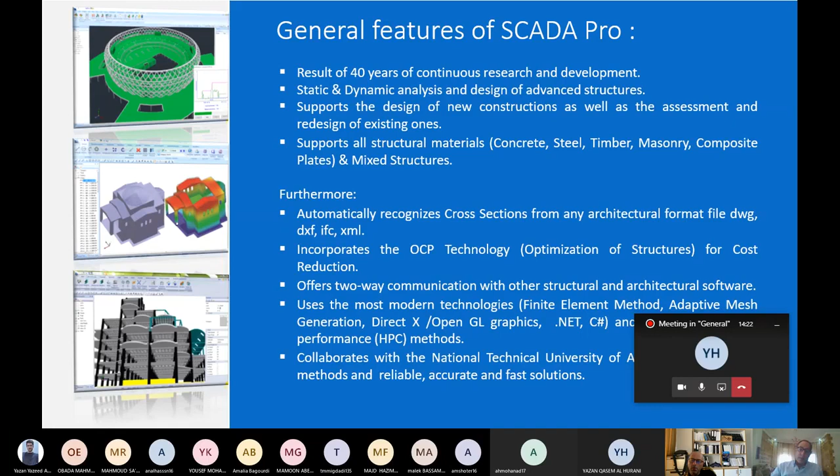It automatically recognizes cross sections from any architectural format file, DWG file, DXF file, and incorporates OCP optimization structure for cost reductions. It also offers two-way communication with other architectural software and uses the most modern technologies. Our software has a collaboration with the National Technical University of Athens to create new methods and reliable, accurate, and fast solutions.

Also, its interoperability with leading applications and standard file types. SCADA Pro integrates BIM technology with two-way communication with any architectural and structural programs. Autodesk Revit, GStarCAD, like AutoCAD, ArchLine, and Arcadia are architecture softwares. IDEA StatiCa is software for steel connection design. As you know, also the structural programs ETABS and SAP.

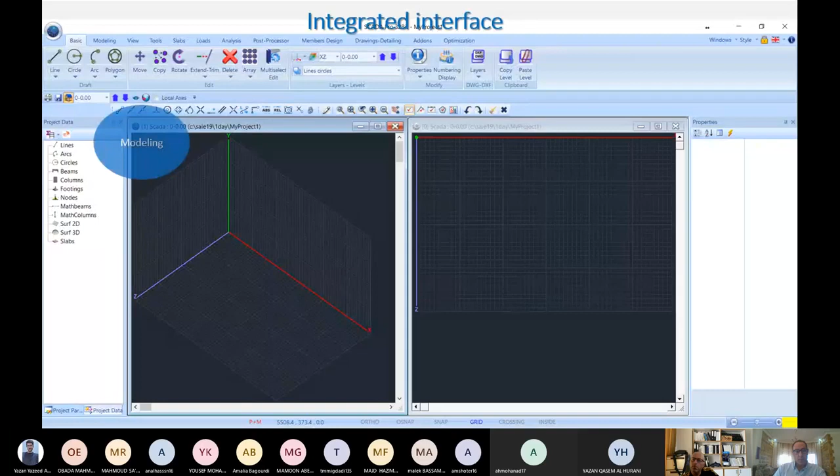This is the interface of SCADA Pro when you open it. It has different steps that we're going to use to start. We're going to start from modeling. You need to model your structures, your foundations, the elements. You're going to see the loads, static loads, dynamic loads, using different regulations, Eurocodes, or each country's regulations and annexations. It also has Saudi building code. You can do the analysis, and it automatically calculates the combinations.

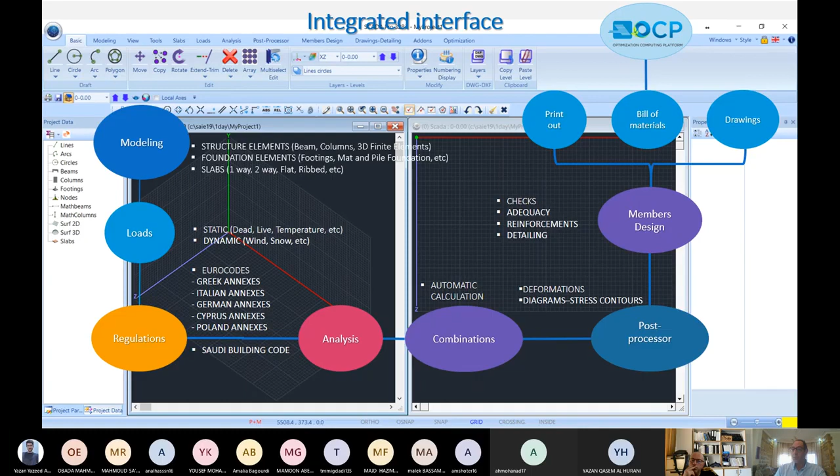In the post-process, we're going to see the deformations and the structural stresses and others. And also in the member design, we'll do the checks, reinforcement, and detailing. In the output, you're going to make the drawings, the bill of materials, and the printouts, and finally we can do the optimization of the structure.

Also, it has an advanced interface. You can create multiple windows in your interface when you open the program, and these multiple interfaces can give you a model with direct display of the screens and checks, also display and edit of data with tables in front of you. It also has a powerful graphic library with high resolution virtual display, so you can see the whole structure that you have modeled.

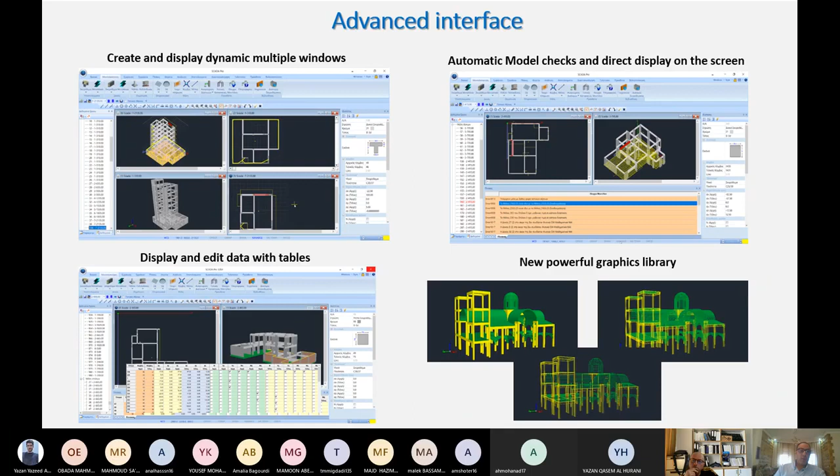Also, SCADA Pro is a multilingual environment which contains 8 languages, which also does the analysis and checks according to the country's regulations and annexations, and provides printouts in the respective languages. Also, it integrates the Arab regulations, Saudi building codes for concrete, steel, and masonry buildings.

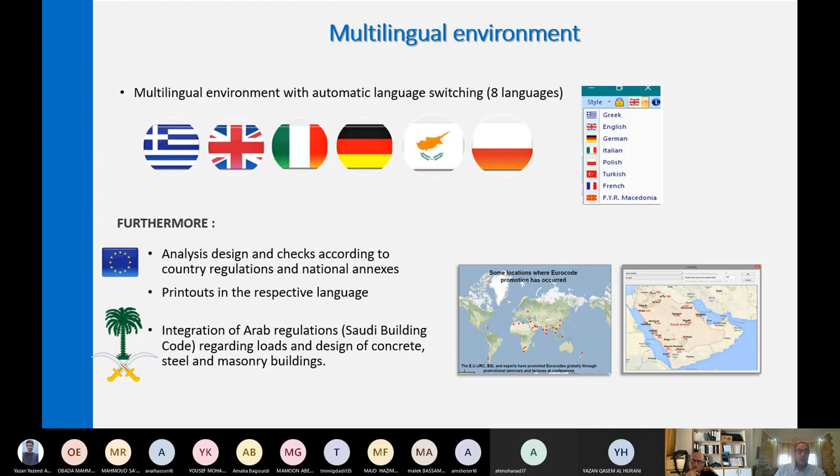Let's see what SCADA Pro enables the user to do, making your life more convenient in the workspace. As we said, it recognizes cross sections from any architectural design, 2D or 3D DXF files. For example, from AutoCAD, a 2D file, you can import it to SCADA Pro manually, or you can import it automatically, which will recognize all the cross sections of the plan and the structure, and will make the models automatically.

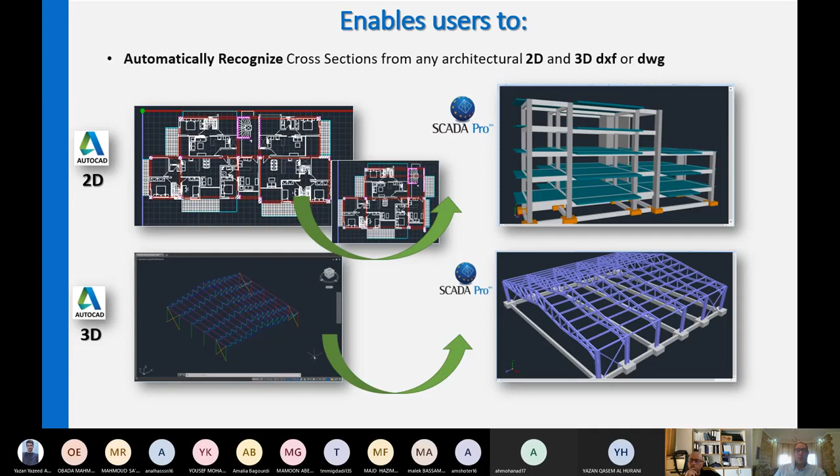Also, in the 3D view, SCADA Pro will recognize any lines. You can insert them automatically just to apply the cross sections and make the final model of the structure. It also enables users to automatically convert lines, arcs, and circles into corresponding design objects of SCADA Pro, and automatically creates 3D objects from the outlines of any shapes through front view identification, which helps you create any structure you want. It also enables bi-directional communication between ETABS and SAP with SCADA Pro.

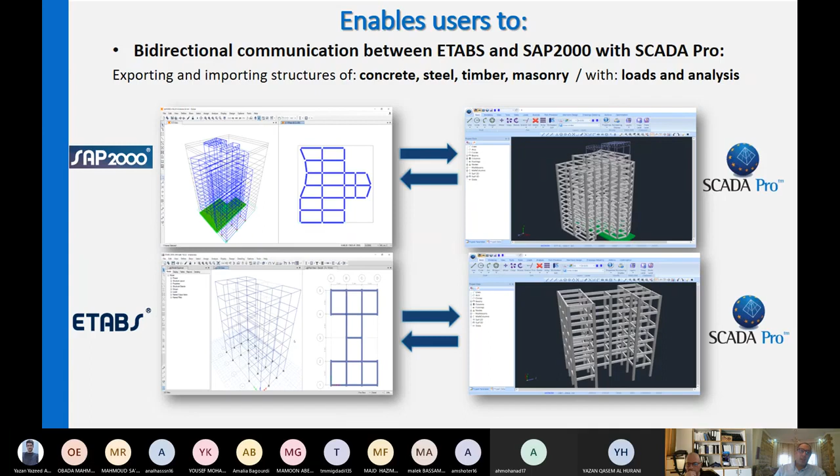We can import and export concrete, steel, timber, masonry with the loads and the analysis. For example, here we have a project from SAP, and SAP has the American codes. You can import in SCADA Pro to use the Euro codes and do the modeling and design of the whole structure, or you can model and design the structure in SCADA Pro, which has the simplicity and other capabilities, and just do the analysis for the American codes in ETABS.

Also, we have bidirectional communication with architecture applications. You can import files from Revit and IFC files from ArchLine that provide accurate data which allow the automatic identification of all components in SCADA Pro - columns, beams, slabs, etc. - with their respective properties in order to create the model, analysis and design.

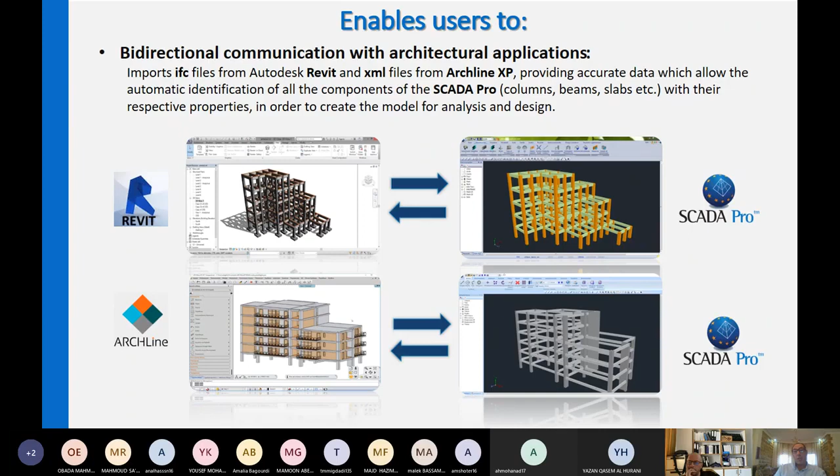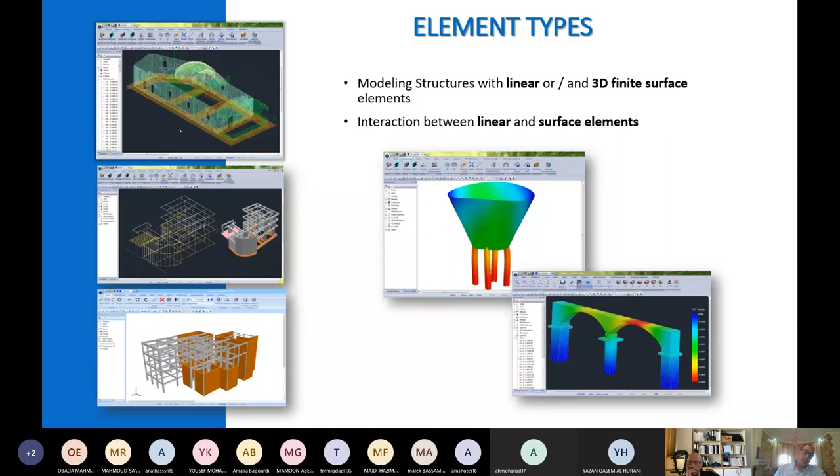Also, we have different elements that the software uses, so you can model structures with linear and 3D finite elements, in interaction also between linear and surface elements. So you have many capabilities in the software.

Also, the type of analysis the software does - we have static analysis, linear static analysis, linear dynamic analysis, pushover analysis. The professor will explain to you what pushover analysis is. Linear time history analysis, non-linear time history analysis, according to the Eurocode and Saudi building code.

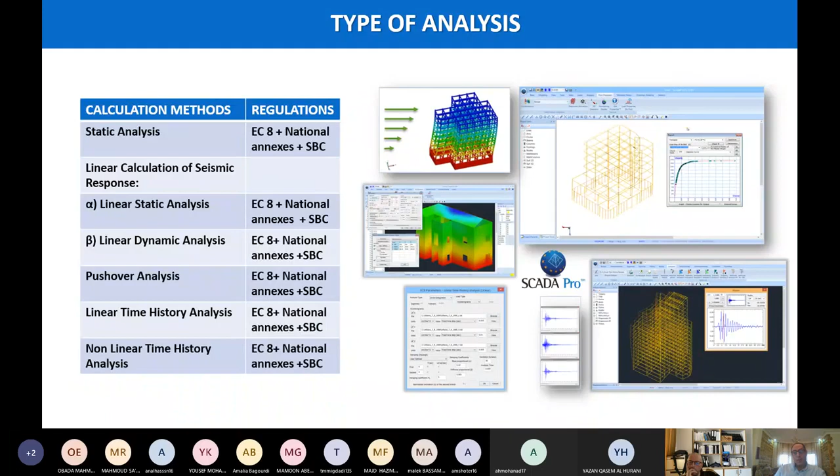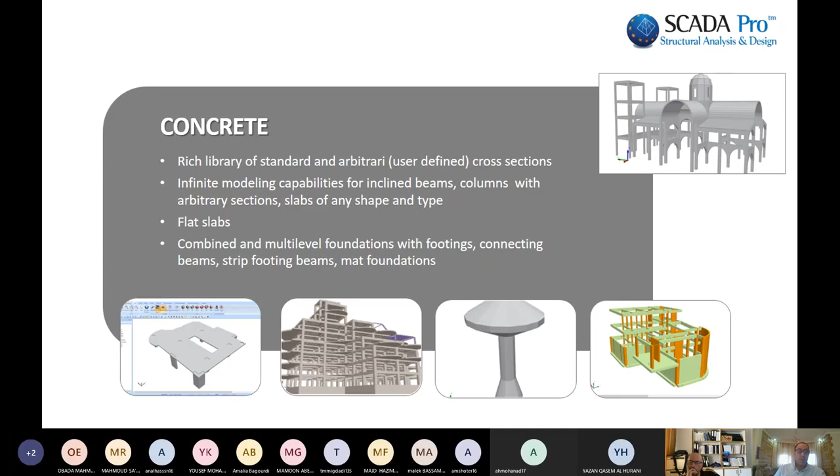Type of materials that you use - we're going to start with concrete. SCADA Pro offers a rich library of standard and arbitrary cross sections, infinite modeling and capabilities for inclined beams, columns with arbitrary section slabs of any shape and type. It can also do flat slabs, combined and multi-level foundations with footing, connecting beams, strip footing beams, mat foundations.

So also here, the simplicity of the software gives you unique features - the software automatically recognizes the thickness of the slabs and automatically designs the whole structure, members, and displays. It also gives you fail design checks, so you can know where the failure is and what the cause of the failure is, and will display the strength ratio in different colors.

Also, a unique feature in design is the powerful reinforcement editor for editing, modification and 3D display of layouts of the reinforcement. So you can do the reinforcement, automatic bending, shear checking, and moment resistance calculation by the M-N interaction diagrams.

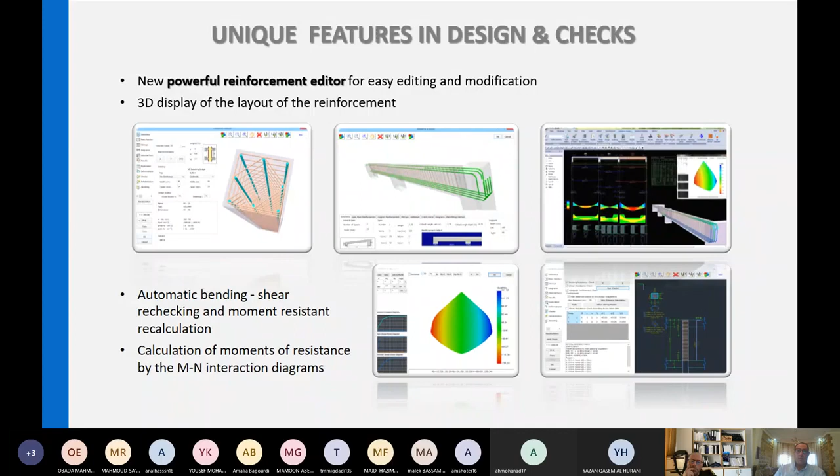So you can do all these, alter them and change them, and see them in 3D view and change and alter them. This will make your life simpler to edit and change these things.

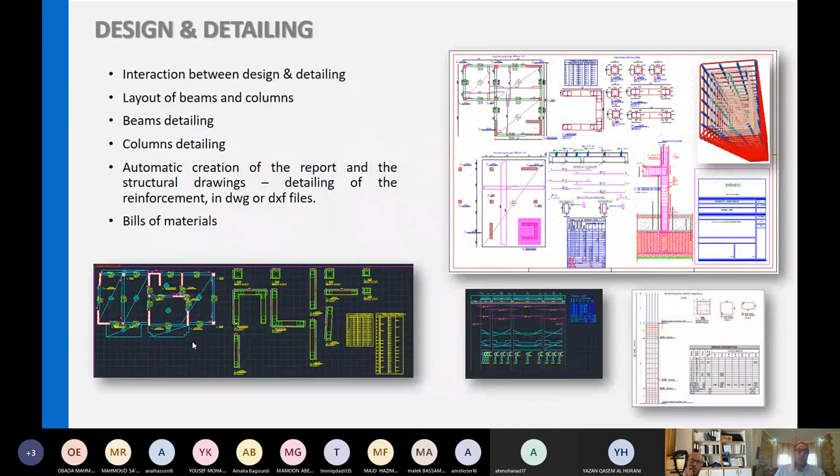Also in design details, it gives you layouts of the beams, the columns, beam detailing, column detailing. You can also create a report for structural drawings, details and reinforcements into a DWG file, and it will also give you the bill of materials.

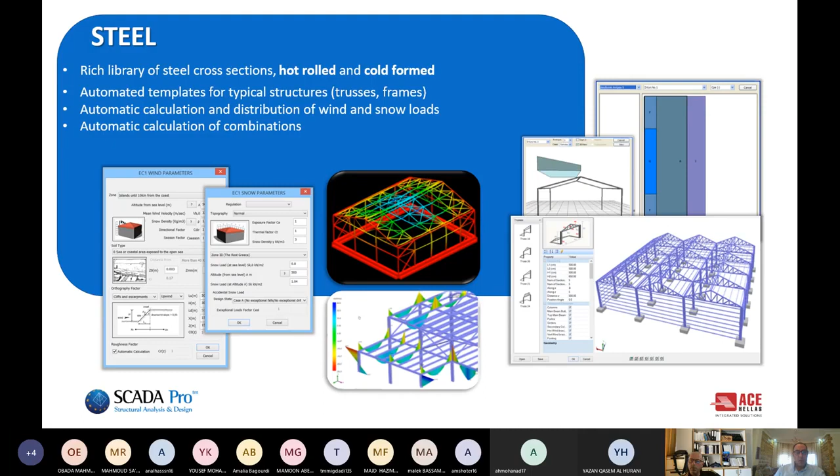For steel, we have a rich library for steel connections, steel sections, hot rolled and cold form, and automatic templates with different typical structures, and it automatically calculates and distributes wind loads and snow loads, and automatically calculates the combinations.

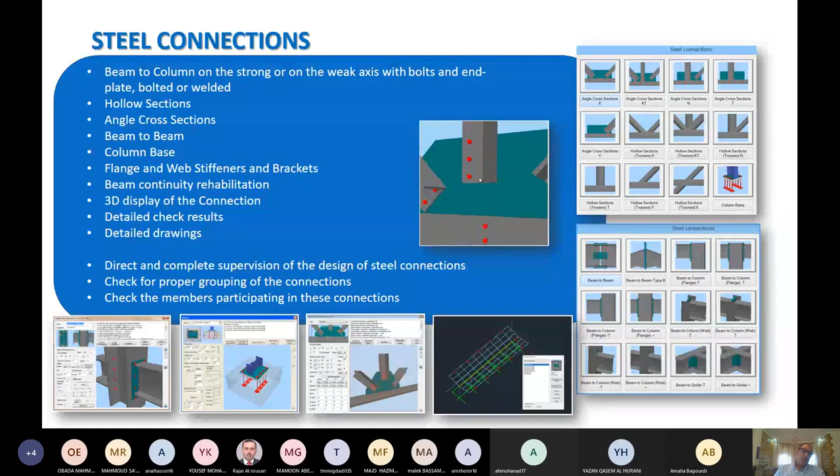You can also see here design checks for the steel member connections, checking for structure members - bending, torsion, buckling - all necessary checks for ultimate and serviceability limits, and analysis design of composite structures, and design of all types of structures.

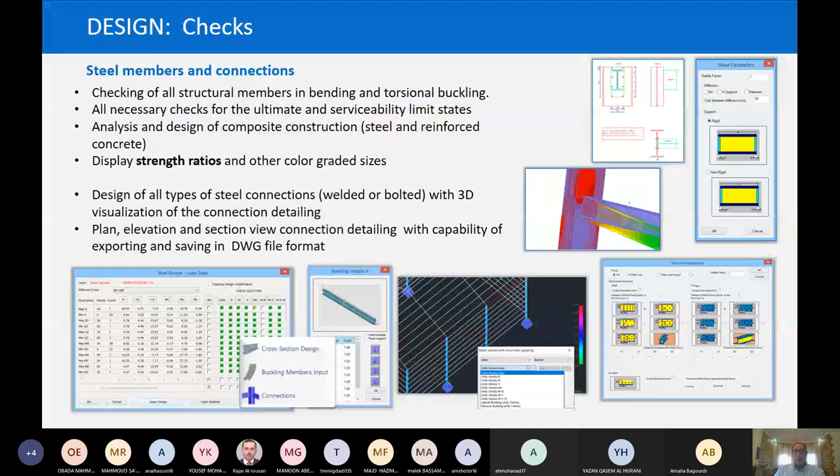All these you can plan, elevation and section view, with connecting details, and the capability of exporting and saving it to a DWG file format. Also, we have cold form steel sections.

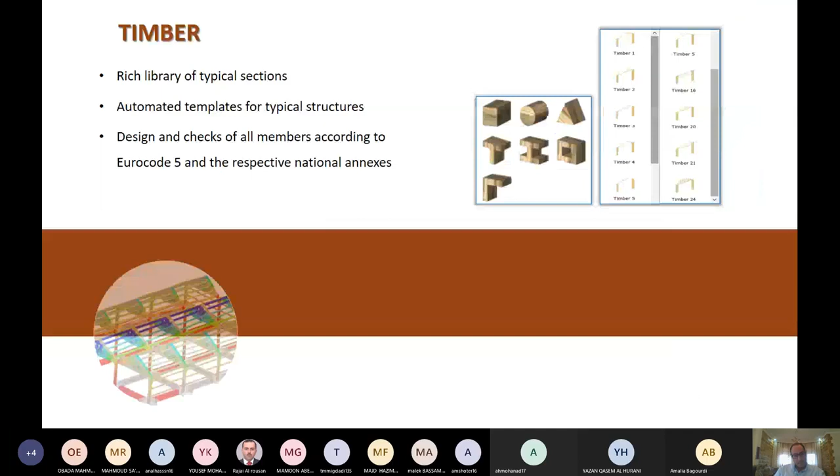Also, timber - a library of typical sections and automated templates, and design checks for all members according to Eurocode 5 and respective national annexes. Also, timber connections - it does checks for the timber members and connections according to Eurocode 5.

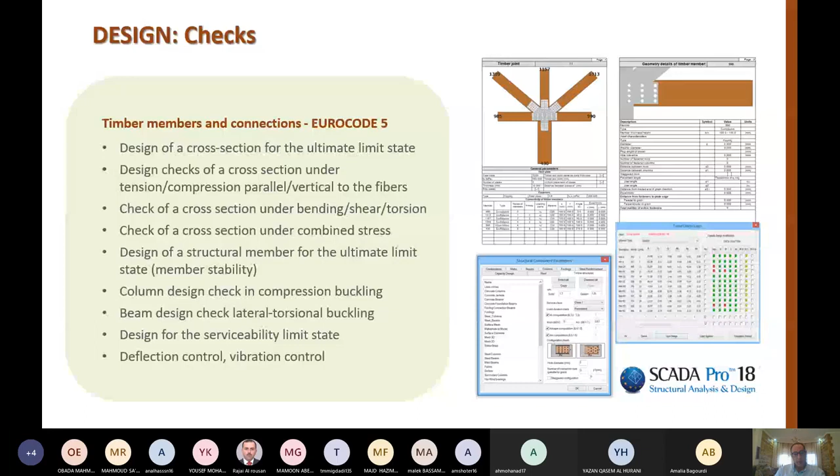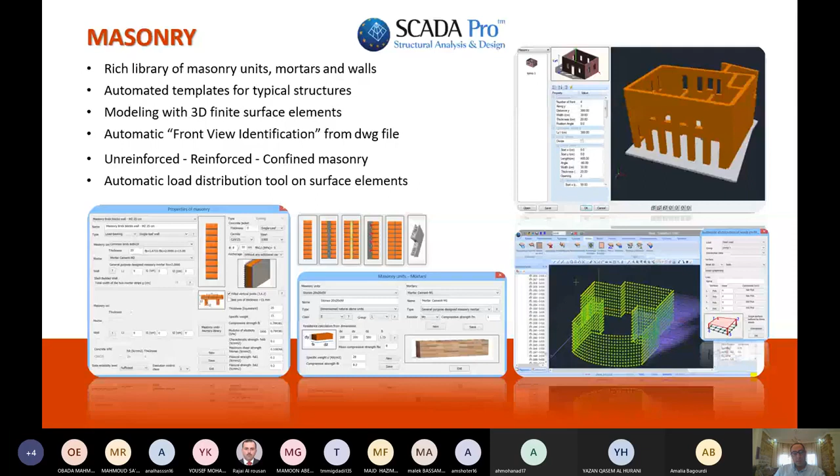Also, we have masonry - a rich library of masonry units and mortar walls, and automated templates for typical structures you can do with 3D finite surface elements, and automatic front view identification from the DWG file. It will also do automatic loads and distribution on these elements, and do the design checks for piers and spandrels of the masonry wall according to Eurocode 6.

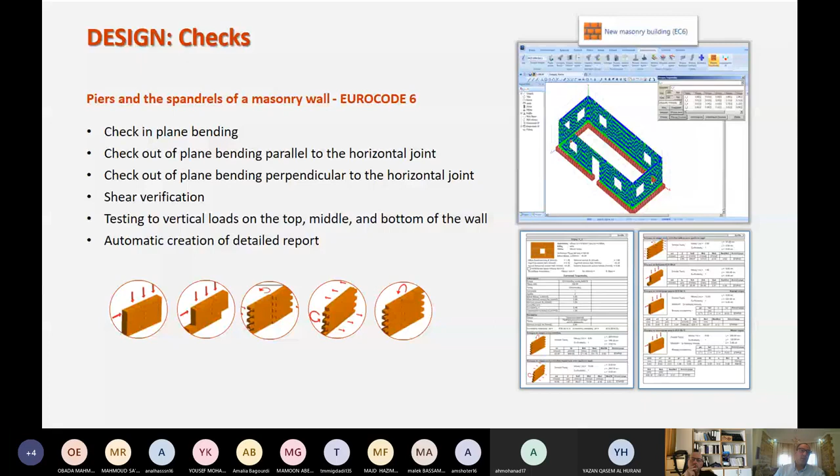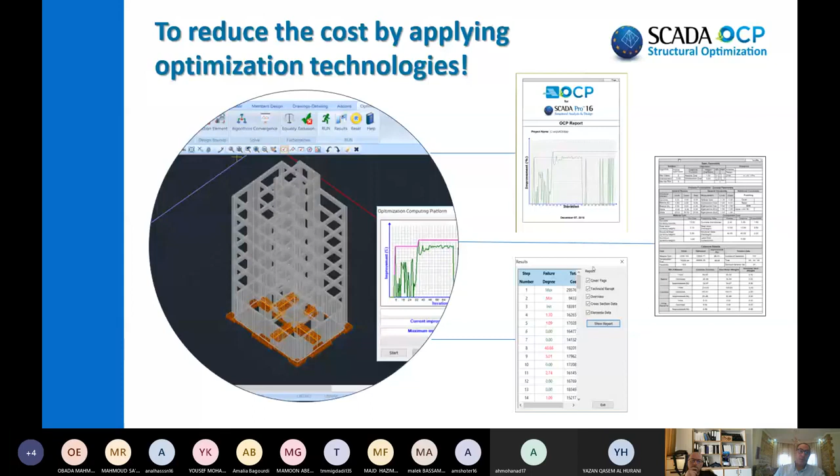And here finally we have the SCADA Pro OCP structural optimization module. It's a module to reduce cost by applying optimization technology.

It's an OCP computing platform that applies optimization theory to real structures with the ultimate goal to minimize construction costs from materials and labor. This will help you reduce your cost from 10 to 25% in any project, and according with the regulations and codes you're using.

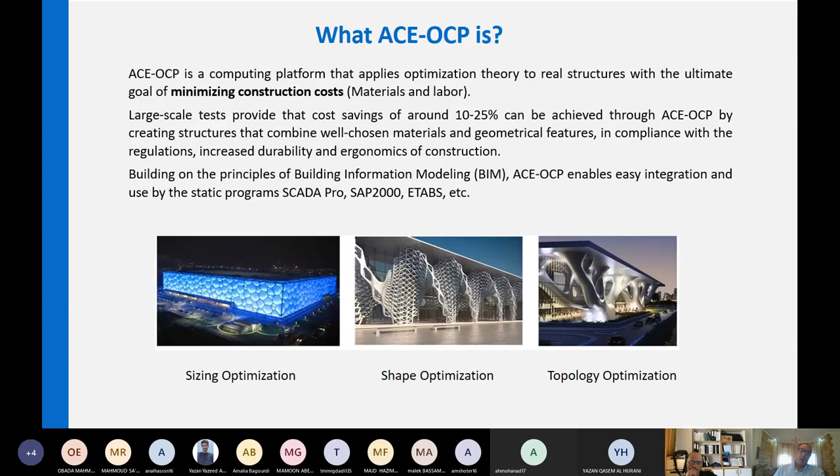Also, it has BIM technology, which is building information modeling, so you can use it with other software like SCADA Pro, or SAP 2000, or ETABS, and others.

Thank you very much. It's a small presentation for SCADA.

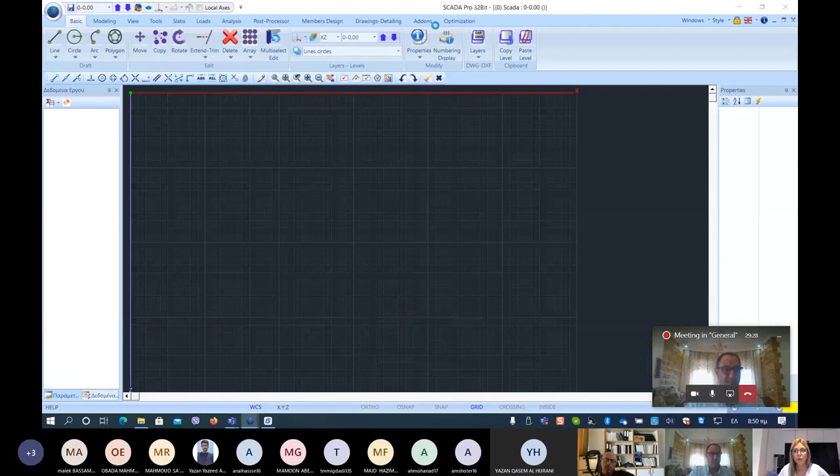I waited a minute to open the software and I will show you what I want all of you to do. I believe you already have the student license and have the software on your PCs. What I want you to do is right click, go to properties, compatibility, and run this program as administrator. You see in my computer it's already enabled because it's already done. Click this, then apply, and you will use it as administrator. This is important because you will have all the opportunities that the software gives you.

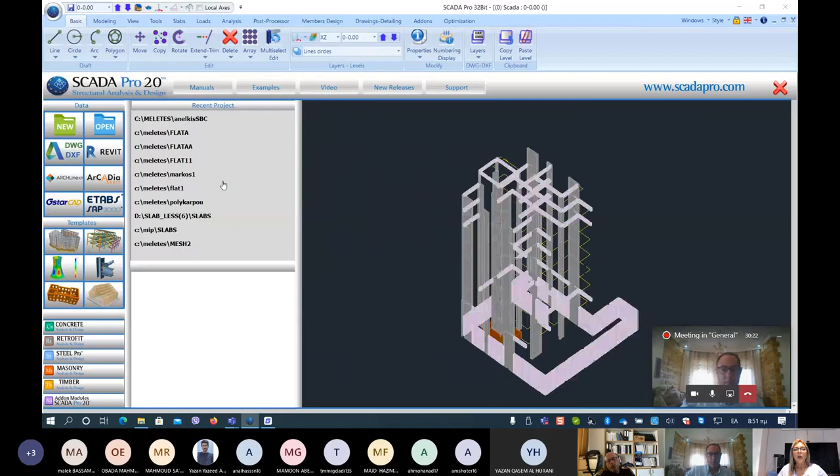So let me go on. Why do I have it two times? Let me start from the beginning. Okay, this is how the software begins.

In the middle of the interface, you see this window. This window gives you a lot of opportunities. This is the first part that we see, and you can click these tabs to start a new project or open an existing project. You can use this button that we will use together - this is very important because you can do automatic recognition of the structural elements, like Mohammed told you in the presentation. We will push this button and see what we can do.

But let me go on. Okay, this is a Revit button. This means that if I click on Revit, I can read a Revit file, an IFC file, and import it directly inside the SCADA Pro environment. ArchLine XP is the same thing - I can read an XML file.

Arcadia is another architectural software, so I can do the architectural part and then use it directly inside SCADA Pro. GstarCAD is another software like AutoCAD, okay? And ETABS and SAP, you know very well - these are structural softwares that can be read from SCADA, and not only read, I can continue with the project inside SCADA.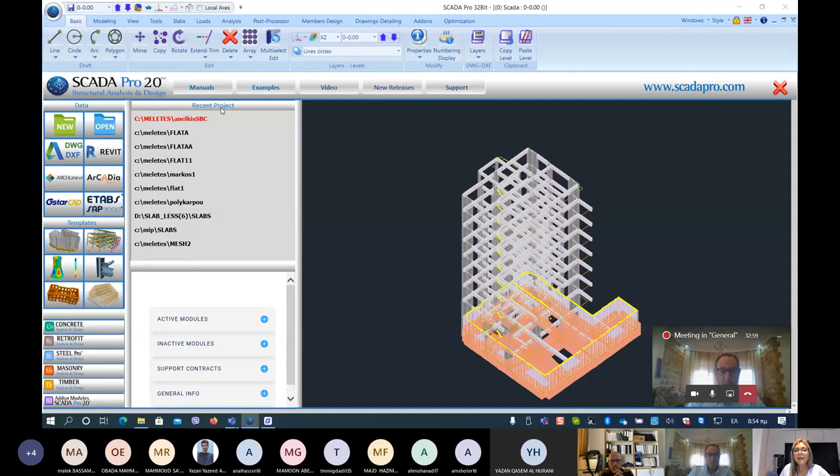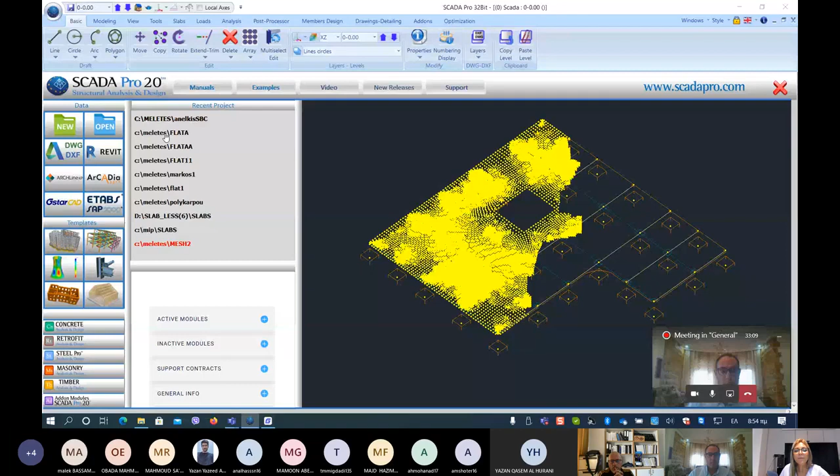And here you can see the different modules of SCADA. So you can have the concrete, the retrofit, the steel, masonry, timber, and all the other add-ons of SCADA Pro. Here I can see some recent projects - if I click on this, I can have a preview of the model inside this project file, and some details about the modules you have, what is active and what is not active in your permission.

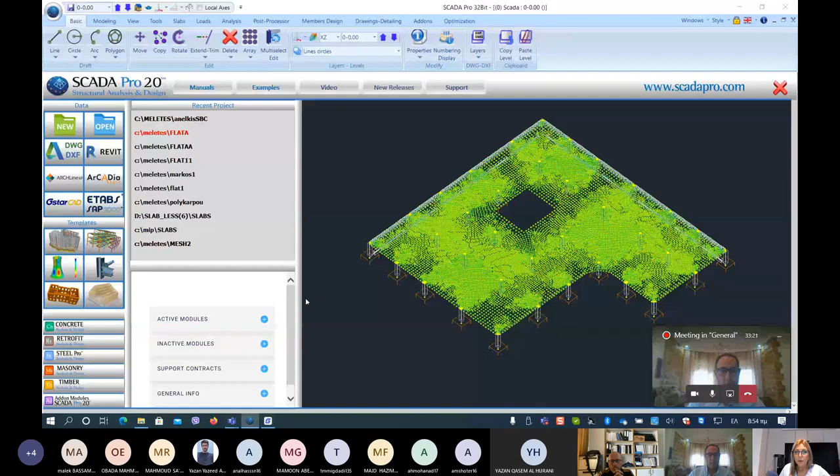If I click manuals, this would be very useful for you. Inside you can find some PDF files that contain the manuals of the software. Each manual has the same name as the tabs you see on top, like basic, modeling, view, tools.

Inside examples, you will have other PDF files that are entire examples of different projects. We will talk about the first example that contains a new concrete building, and we can see a lot of features of how to complete an entire project. This will be useful for you.

Videos give you the opportunity to see some videos that can help you have a look at what you can do inside SCADA and how to do it. These are the most important. New releases and support are not so important.

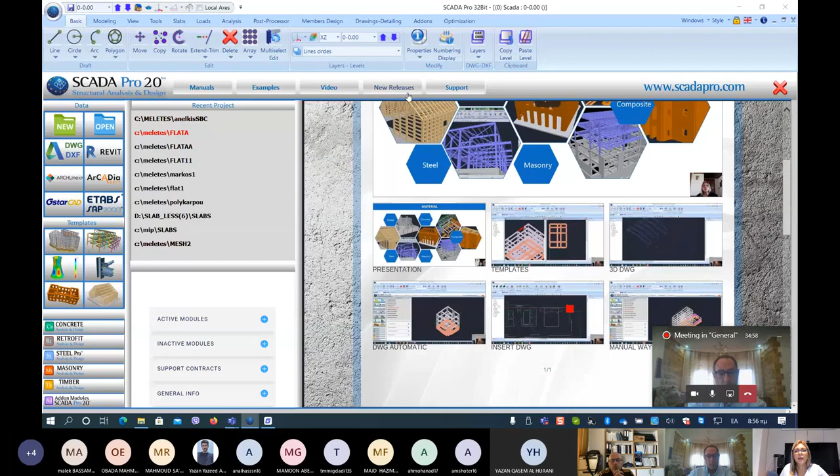So we explained this first window that is very important, but let me tell you something: if you don't close this window, you cannot do anything. I click here and I only hear some bling, so I can't do anything. I need to either close this window or click one button in order to start doing something.

Let me tell you another important tip. I will start with new, no automatic way, nothing ready. I will not use any BIM connection, just new. I click new, and here the software tells me to give it the name of the project. So the first thing you always have to do is type a name for the project.

So I will say this project is called lesson1. Let me tell you something: because this is an international software, we have to take care of some rules. Because of different characters in Greek, in Jordanian language, please use only English, Latin letters in order to type the names. I want you to take care of these details: use only Latin letters and numbers, and please do not use any question marks, lines, spaces, or specific characters.

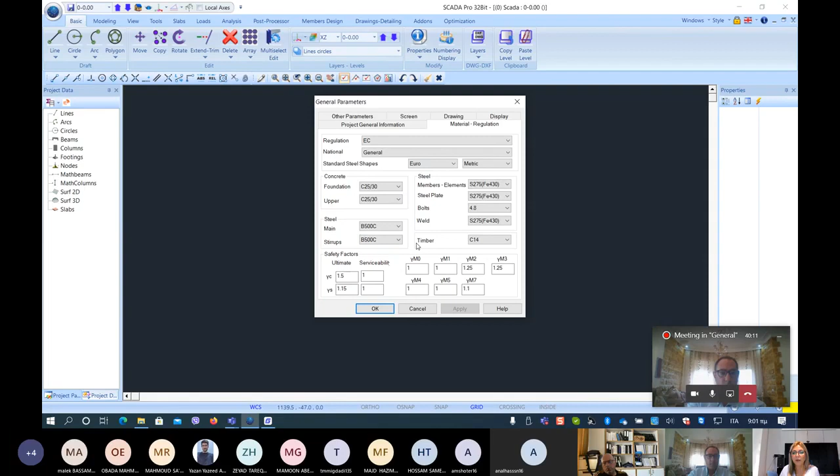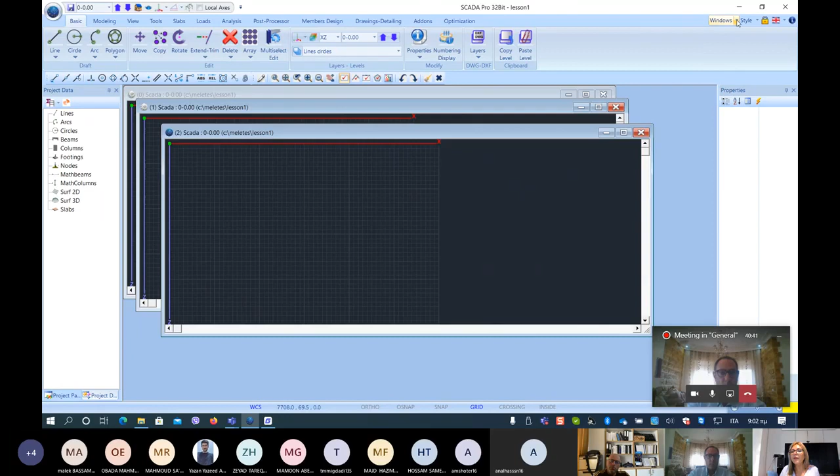I click OK, and now everything starts. So you see two kinds of windows inside the environment. I can decide to switch off one of them and keep the other, or I can decide to create more windows like this, and then decide how to arrange all these windows.

Why do we have all these windows? Because you can see the 2D view, the 3D view, and maybe the virtual view, and maybe you have two screens, so you can move one of them to the other screen. The most important thing is that everything you do in one window, you can see in each one. You can also start in one window and continue in the other. We will see all these things while we work.

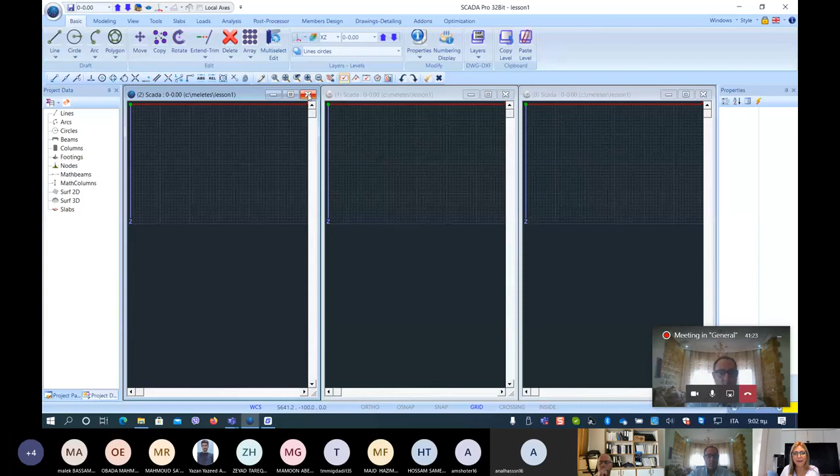So let me start with one window. Here we are in the 2D view. You see something maybe a little strange: the 2D view is the XZ axis, and the Y axis is the vertical one. This is fixed, you cannot change it. You will use XZ for the floor plan, and Y will be the height.

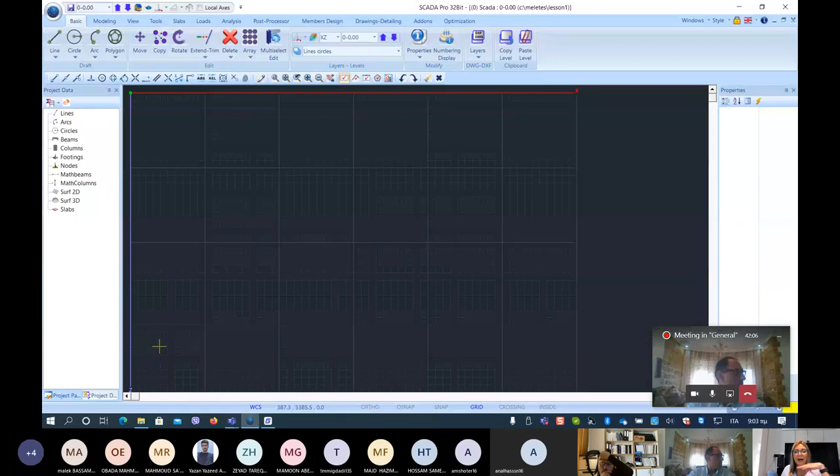In this environment, let's start explaining these tabs. We'll start with the basic one. Here you can find commands that are very common in CAD software: you can draw a line, a circle, an arc, you can move, copy, rotate, extend and trim, delete. These are architectural commands.

Here you can see layers, something very common also in CAD software, and the levels. Let me explain this. You see that I am in level 0. So the first window is level 0, and what's really important to understand from the beginning is that level 0 is the foundation level.

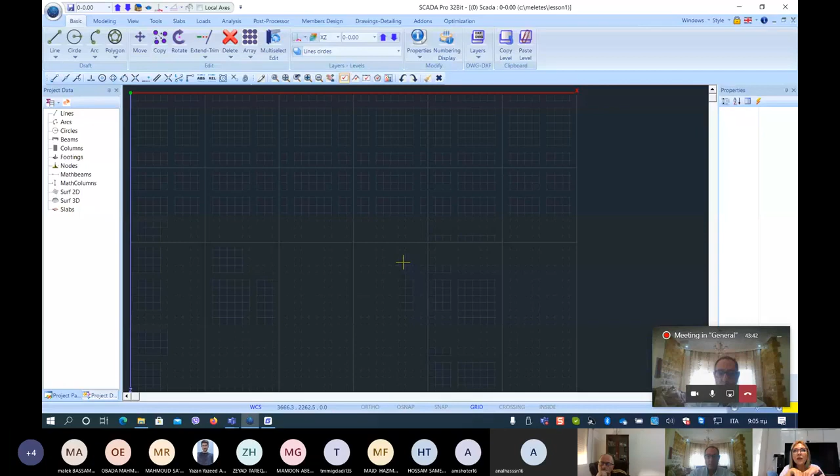Let me explain. Maybe you have a construction with 2 or 3 foundations. There are big buildings with a lot of foundations, but don't worry, this will be the first, bottom foundation. That means the first level will be the second foundation, then the third foundation, and then the levels start.

So we start with 0, and we can create other levels. How do we do this? We click here, and now this is the level management, and I create a lot of levels. I can say, for example, directly put 'add', and as you see, I made a lot of levels. After that, I can use the arrows to go up or down.

Another good thing to say is that if I go away from this tab and open the modeling tab, I'm not sure what level I'm working in. This is why, as you see here, I created my own line of commands so I don't need to look inside the tabs to find commands I use very commonly. How can you do this?

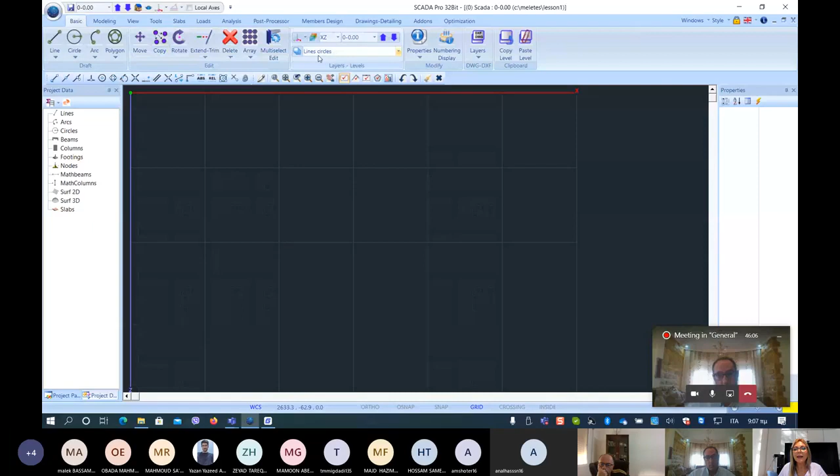For example, I can remove some other commands that I have here. I put the level numbering and the arrows to go up and down. I will tell you the most useful commands, and explain why you need to create your own command bars.

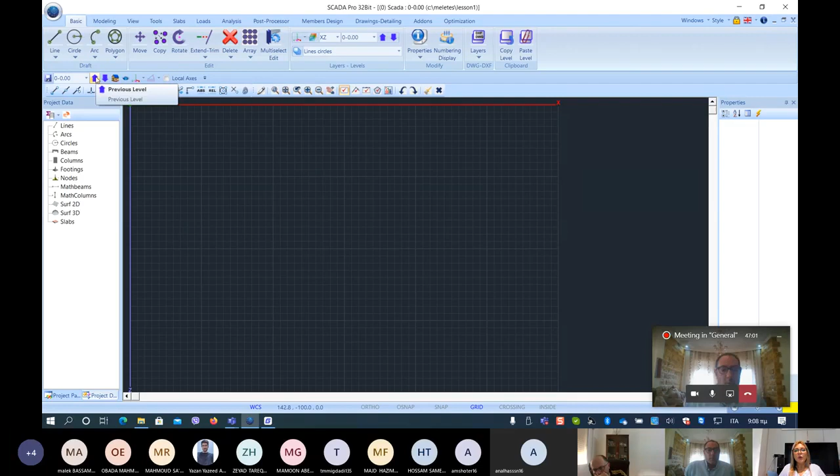Another thing is that I can customize this, not minimize, I can come here and show it below the ribbon. This is where I prefer to have my toolbar, because it's more useful when I use the mouse. So here I can be in modeling and go upstairs and downstairs without entering each time inside basic.

Let me finish with this part. Here we can see some properties, numbering. It's not very useful now, we will use it after we put something inside. There's a DWG and DXF file option here, meaning it has something to do with a drawing file I could insert inside. We will talk about this.

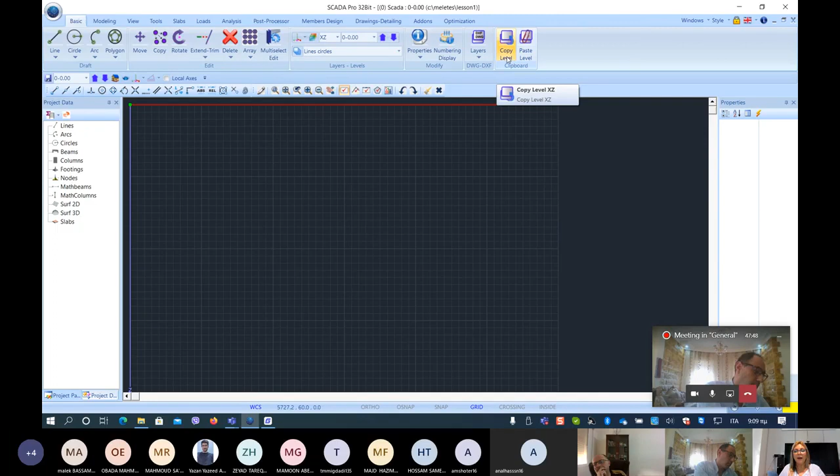Then copy level and paste level, very useful, because I can draw something, model something inside a level, and then copy and paste it to another level in order to save time.

Modeling. Modeling is a very important tab, because it gives me the opportunity to model each structural element that I need for my project. We start with columns. You see there are concrete columns, steel columns, and inside steel there are also wood columns.

What I want you to realize is that inside this software and environment you can find all kinds of materials: steel, concrete, masonry, timber. And all the commands are common for each material. This is very useful, because when you learn something, you don't need to unlearn and learn something else for another kind of material.

Nice footings here. So foundation, surface elements, very important. Mohammed showed you that you can use linear elements and surface elements.

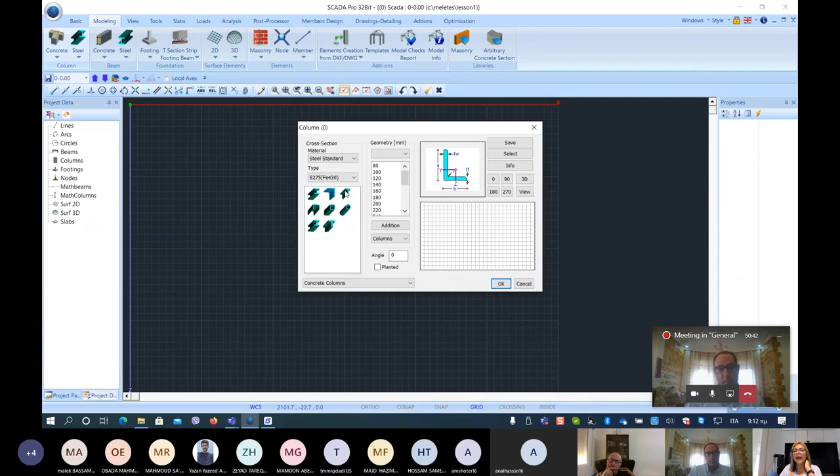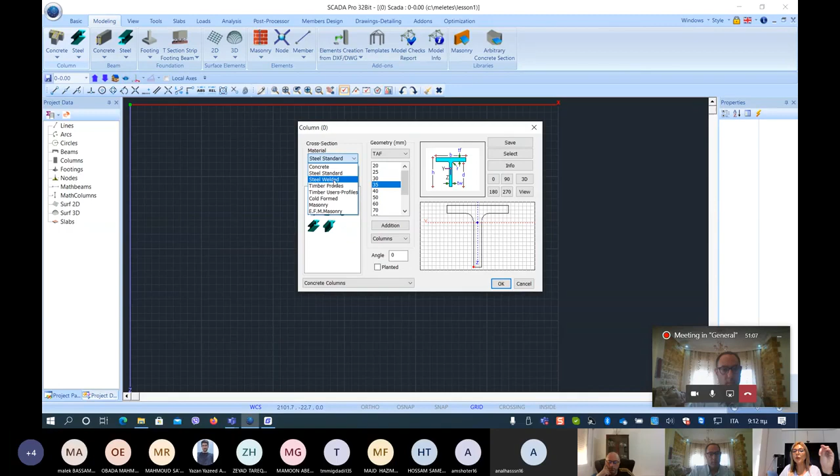Libraries of sections. So about the steel, you see that there are some libraries that are precise, okay? You cannot create them, you can only decide the dimension of them, because they come from Eurocode, for Eurocode 3. So these are the sections that Eurocodes use. And this is the same thing about timber profiles, these are the profiles that Eurocode uses.

And what about concrete? Concrete gives me some bigger opportunity. So I can select, for example, the geometry, the type, but then I can decide the geometry. How can I do this? You see here the design and you type the numbers. So very, very important to realize that all the dimensions are in centimeters.

So let me type, for example, 100 centimeters by - the Z, you see, this is the one. So let me type 30 centimeters, another 30 centimeters, and then for this part, let me type, for example, 120 centimeters. And you see that you design this here, and you can also see it in the 3D view, and you can realize the local axes.

So these are the global axes, and you will see them inside SCADA with the big letters. I don't remember how we can call them - so the big letters, and these will be with the small letters.

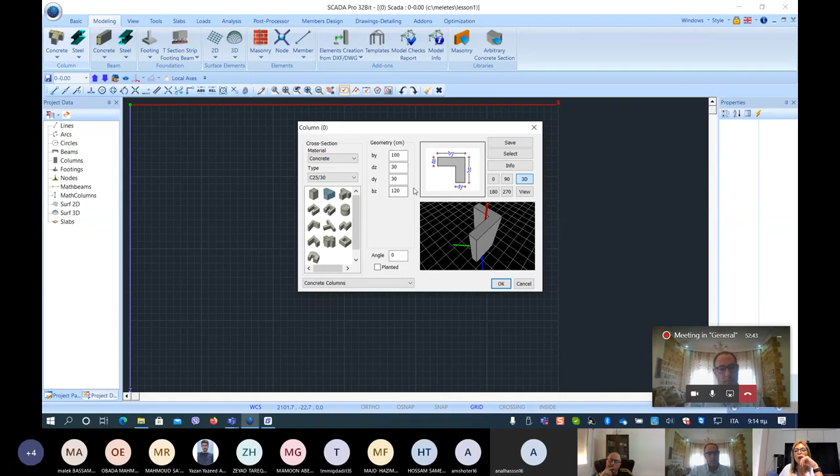Okay, so if I now click OK - no, let me show you another thing. Here you see there are some points, and I can choose these points, and these are the insert points. I can also change the direction of the section. So let me click this insert point.

Also, please note that I told you that there are the layers, and here you see these are the SCADA Pro layers. So these are the structural layers, and you see that automatically the software inserts all the elements I decide to insert inside the right layer.

Okay, Muhammad, is there any problem?

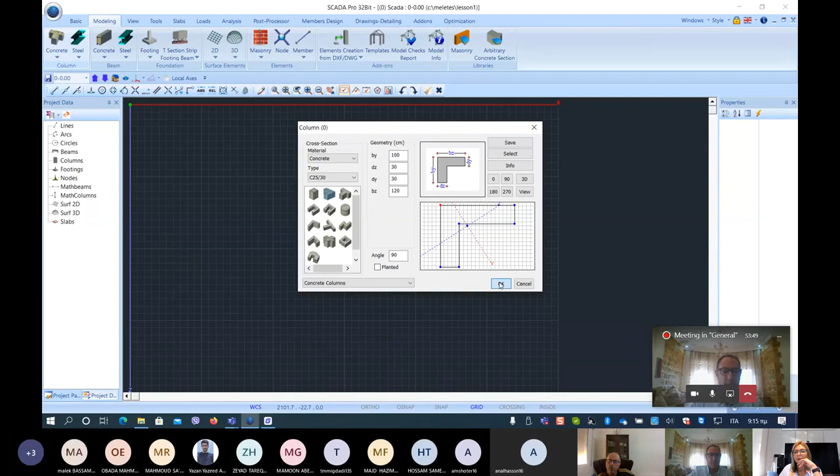Okay, I go on. So I click here, I click OK. And now here I see this section. So I can just left click and leave it there, or I can select some snaps.

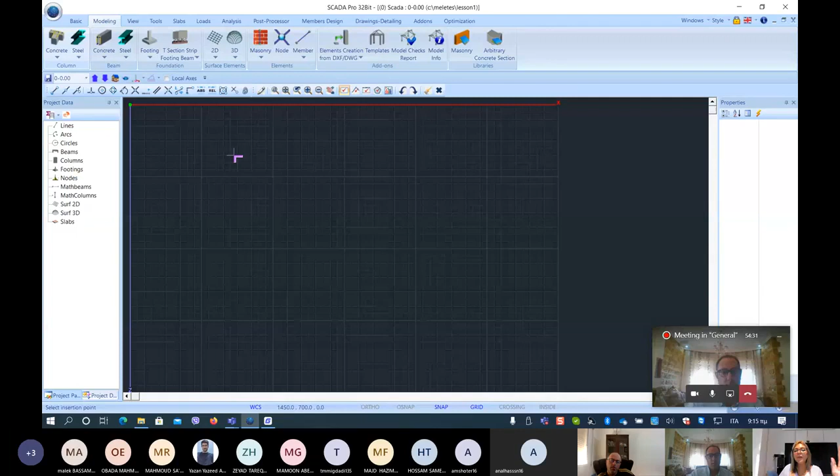We all know about snaps. I can, for example, snap to grid. So what I mean by snap to grid, you see I click and I click the grid. So I can insert this on the grid. The grid is 100 by 100. We can change it, I can show you, but as default, these squares are 100 by 100.

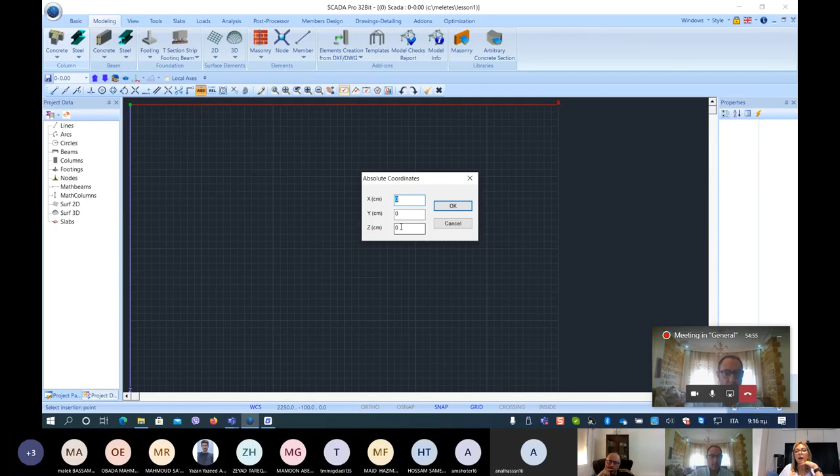So I can click and leave it here, or I can use the absolute or the relative coordinates. So from the absolute coordinates, I click 0,0,0, or I can say, for example, 0, and let's show you 100, and I click OK, and you see, let me go near, that this is 100, and this is where the software inserts this section.

I can go on by inserting the same section. You see, I click and I still have this section on my mouse. If I don't want to have this section anymore, I just right click. So I think it's easy to understand how to insert sections.

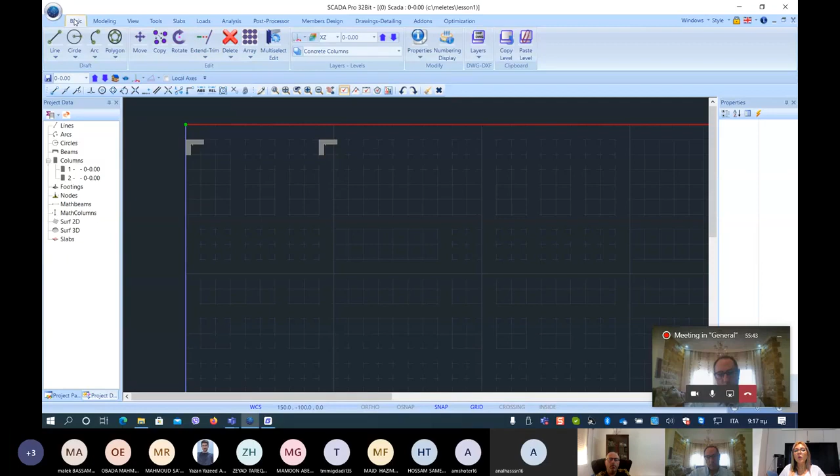Then when I insert these two of them, I can go on basic and I can work like in CAD. So copy. I can use, here are the snaps, you see - absolute, relative coordinates, and here are the selection opportunities. So the window gives me the opportunity to select all by window.

Then you see here on the bottom, I have some commands that help me realize what I need to do later. So it says select objects and right click. So I right click and then it tells me give me the characteristic point, and I give this characteristic point and then the position point, and now I have 4 sections of columns.

But let's see another thing.

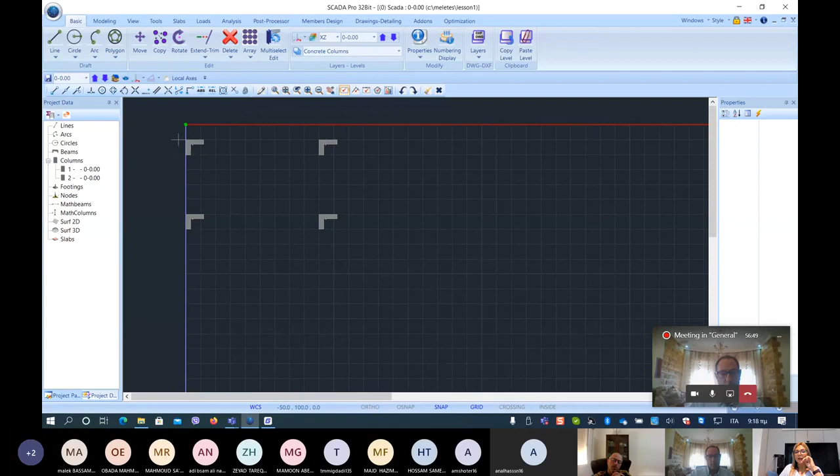I switch off the snap, I don't need it anymore, and I go on this element. So I click on this element and look what happens. In the left part, I see a tree, we will call it tree. So I see that inside the columns group I have this element, I click here and I have this one. Now I can also refresh and open and see that there are 4 columns.

And here is the other one, and I can see inside in the right part the properties. So you see that this is a concrete material section, this is the type of the section and the type of material, and here you have the geometry. The most important thing is that you can change everything here, you see.

So I can, for example, say that this would be 130, and you see this changed. And if I want to change all the characteristics of this element, I can go here on 'more', it opens again the inserting window. It gives me the opportunity to change even the section. So I click OK, and I can change also the section.

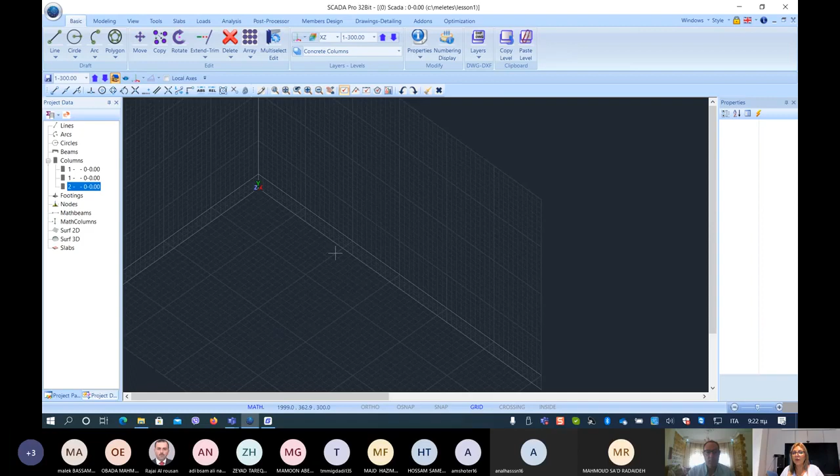And why is this? Because these are sections. So let's explain this: sections are like a piece of paper, so it has no three-dimensional characteristics. It will have three-dimensional characteristics after I do the mathematical model of these elements. So this means that these are sections. Then there is the mathematical model, and this means that section plus mathematical model gives me the structural element.

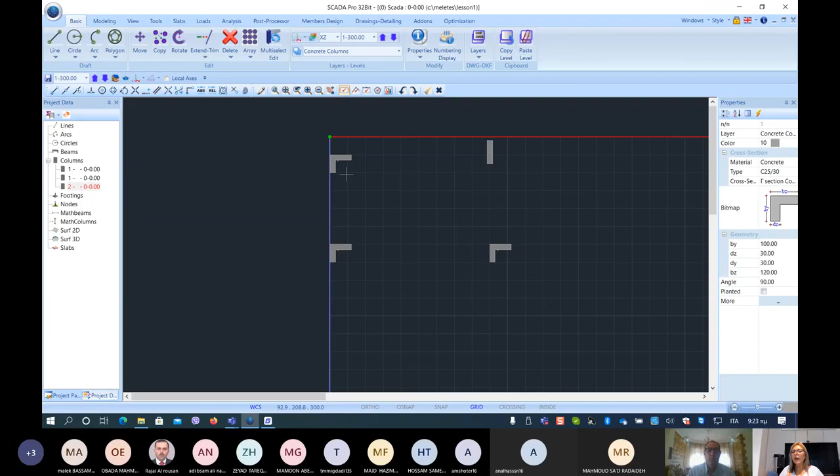That was a preview of what I'm going to show you now. So I am in the first floor, and let me put some concrete beams. I select the simple one, so 30, 60. It goes directly in the concrete beams, and I click OK, and I want you to see something. I select the snap, the most common is the nearest one.

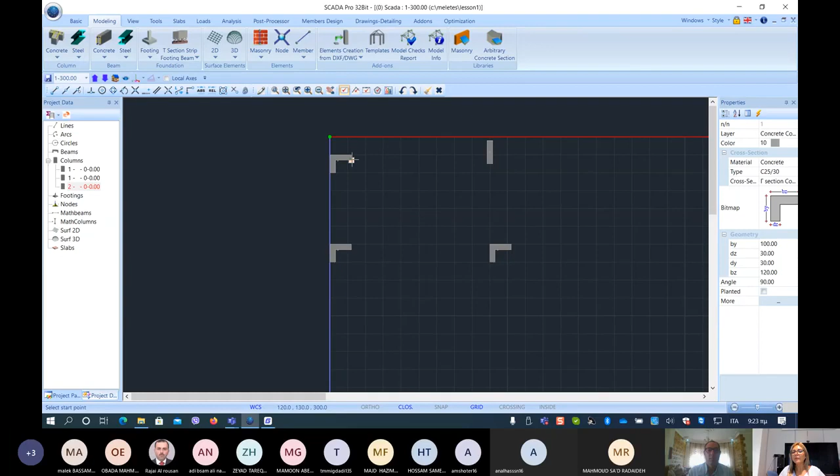So I click here, and I can start from a lot of points. Let me start from here. You see, I start from here, but it gives me the insert point of the beam to be the center one. I can click tab, I just click tab on my PC, and you see I can change the position. Okay, so I need here.

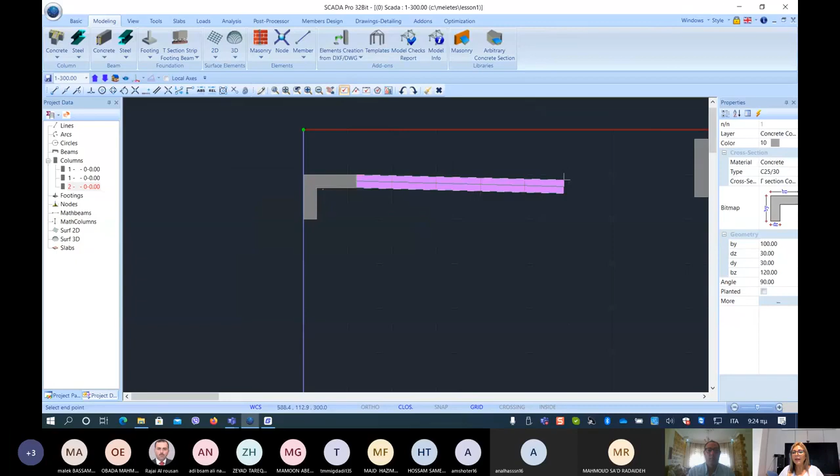Then I can go in some place, like let's put it here. And then I can start from here, and let's decide to put it here. From here, tab, I put it here, so I can do whatever I want. This is only to show you something. So I have this combination of beams and columns, okay?

And now, if I go downstairs, you remember I have only the columns. Here I have beam and columns. And let me do the step that I told you, because this is important to understand what are the linear elements. I go here in Tools.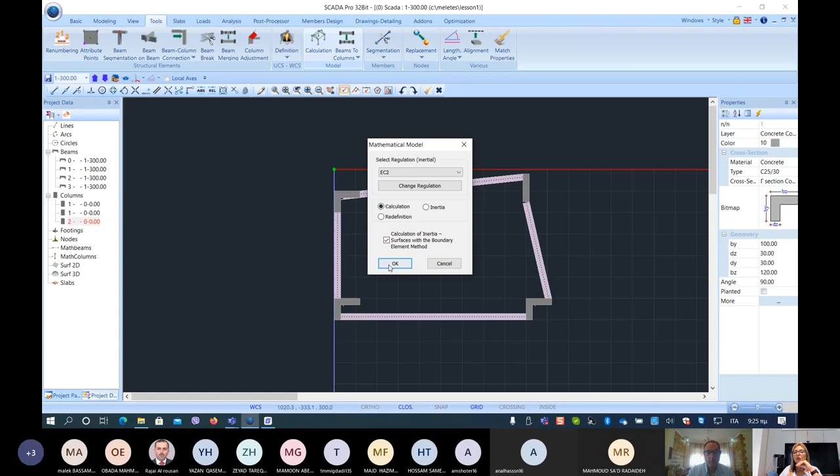I see the new tab that we didn't see previously, but I tell you that this is the most important command, because this is the calculation of the mathematical model, meaning it will give me the inertial characteristics. So I click OK, and let me explain you what happened here. Okay, now I have the opportunity. Let me open another window, vertical.

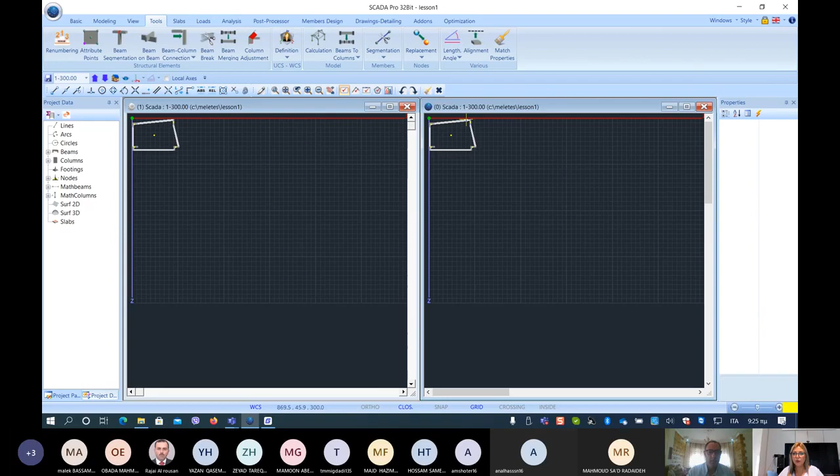So I click, you see, if this is blue and this is gray, so this is the active window. I put my mouse here and you see this is blue and this is gray, so this is the active window.

So I decide to see this in 3D view. Here is the 2D, here is the 3D, and you see now not the sections, you see some kind of lines with some kind of other lines, smaller in the beginning and at the end. But this is a very important point, and this is where I think we can focus.

Because now if I click here, I see in the properties, let me make it a little bit bigger. I see that yes, the cross section is a concrete beam, but the most important thing is that now this concrete beam has moments of inertia and has all the mathematical characteristics of the concrete beam.

Also, I see a group that we call rigid offsets, and you see some dx, dy, dz, okay, and these are the rigid offsets. So let me explain you what these rigid offsets are.

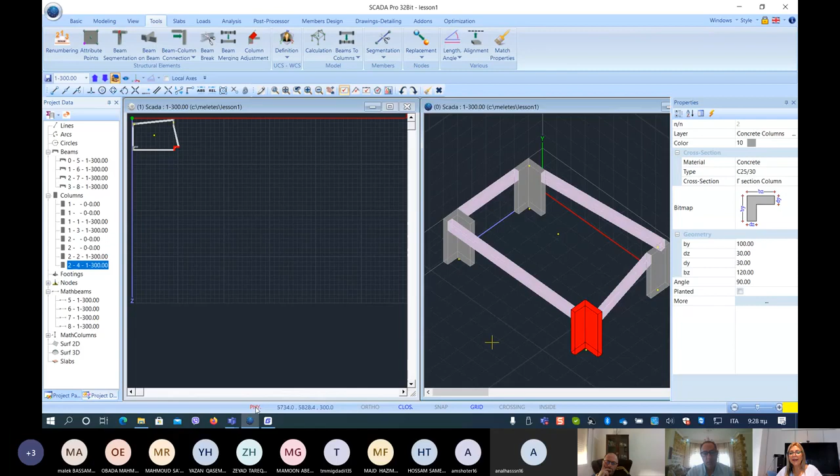I click here again so I can see the mathematical and the physical again. So look inside. This is the beam and this is the column.

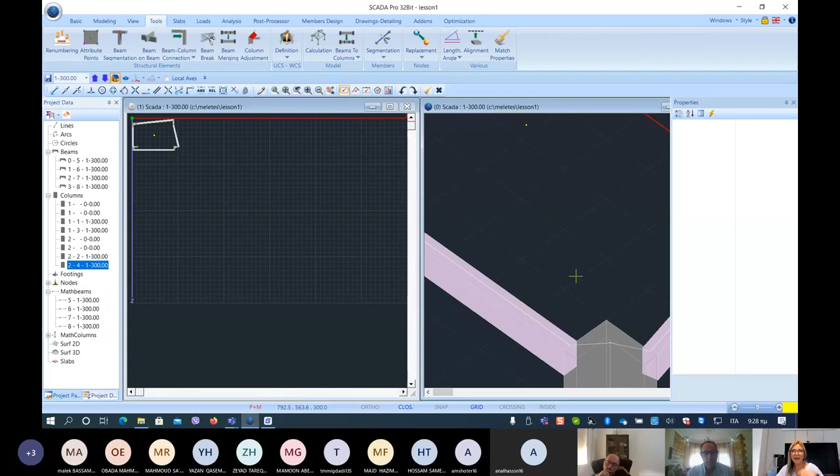When I need to realize this in real time, I need to insert a beam, and then I will stop the reinforcement and the material of the beam here that I found in the column. But the column has this node that is the geometrical point of this section.

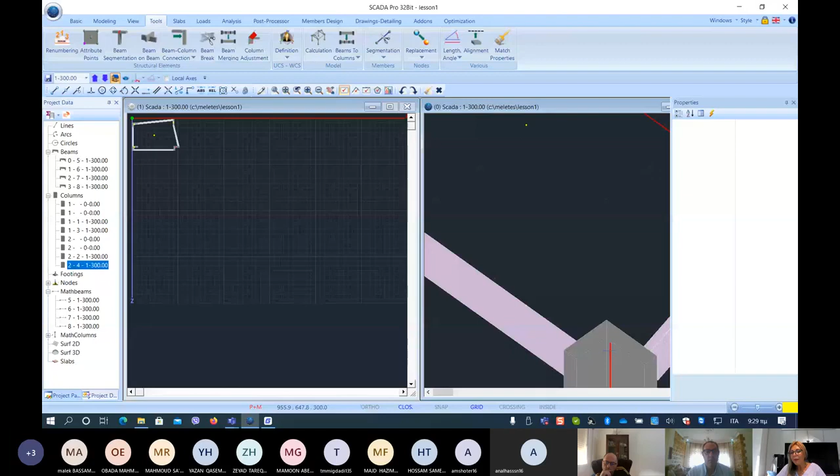So if I don't have this rigid offset, what will happen? This concrete part will arrive until this node, meaning that I will have more beam, a bigger beam, okay, and a bigger reinforcement. That means that even in the counting of material it will be not right, and also in the design of the reinforcement it will be not right.

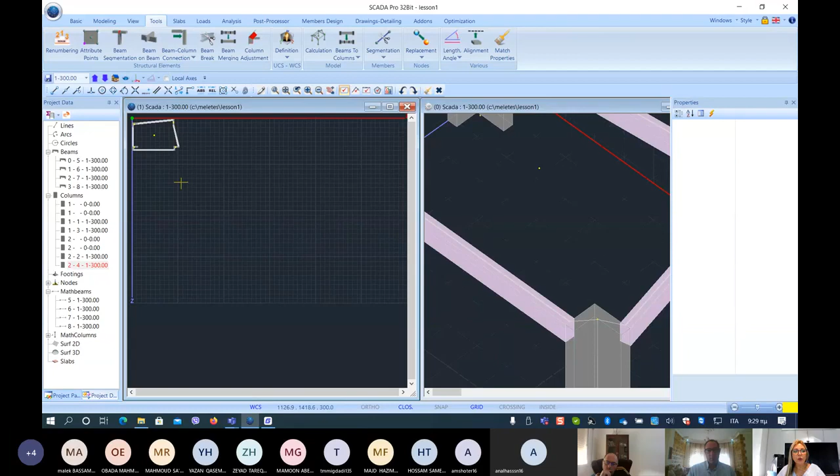That's why the software automatically inserts this rigid offset. Let me show you this also in the 2D. Let me show you what happens if I decide to make this rigid offset zero. You see, I have the beam here, but the mathematical element of the beam is here.

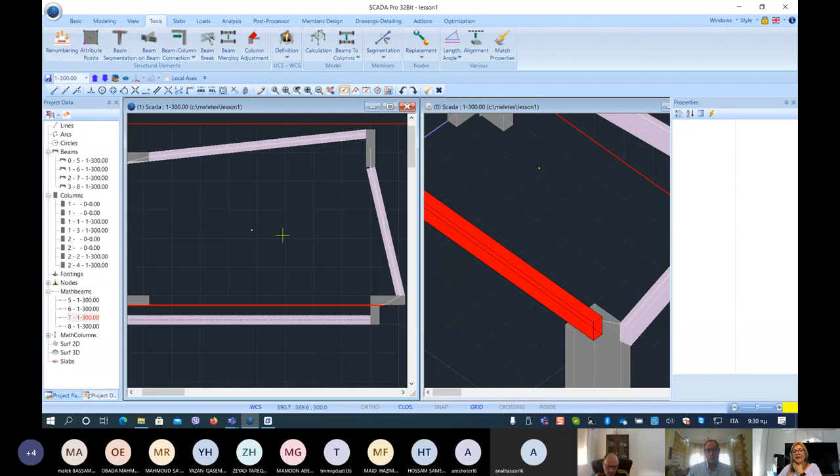So what is really important to understand is that with SCADA Pro, you have the opportunity to have automatically the rigid offsets. If some of you used to work with SAP, for example, this is something that the user needs to do manually, needs to go here and find how is the dx, and write the number in order to combine the mathematical model with the structural element.

The last thing I want you to see for this first lesson, this first contact with SCADA Pro, is that after we create the mathematical model, we see nodes inside. So we see here vertical elements that are the columns. So I see a line, okay, a linear element with two nodes, one node and a second node.

And these are the nodes that make the connection with the other elements, okay? So that's why we call them linear elements, okay?

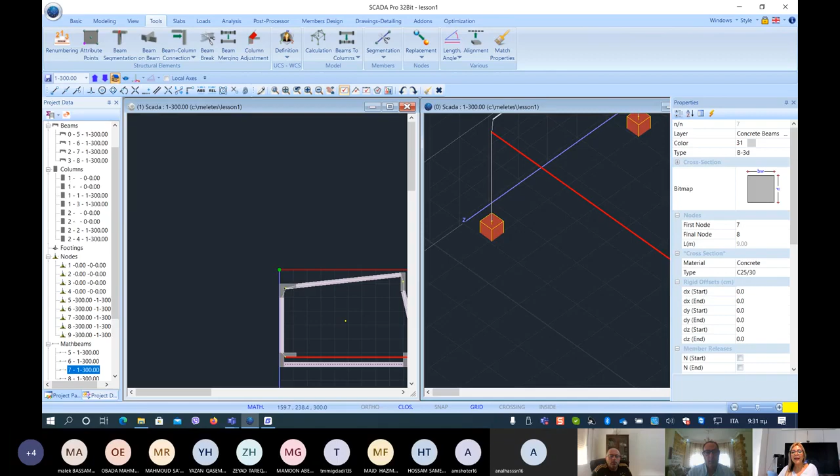Another thing that you see here in the middle of the floor plan, you see another node. This is the master node. What is the master node? The master node is a node that gives me the idea of the slab. So let me explain you.

When you have a slab here, okay, means that the nodes that are around this slab are in some kind depending, okay, in the deformation and the movement of the slab are dependent of this depending on the slab. So this master node gives me this function, okay.

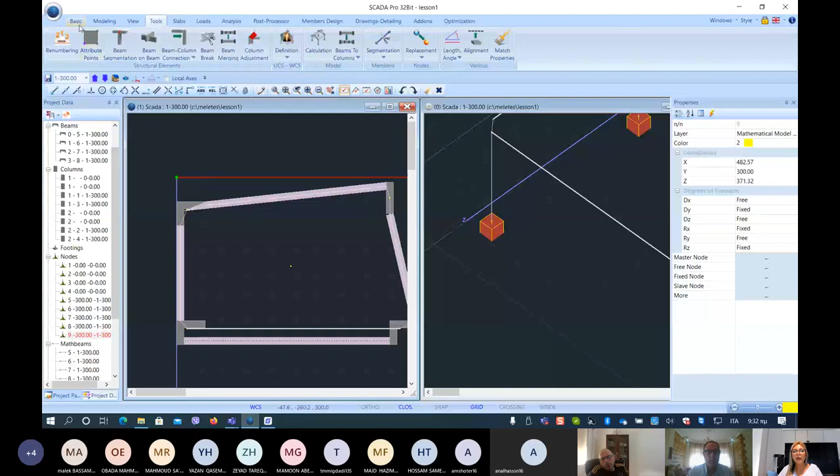And how can I see about this master node? I see it here. When I create the floor plans, you see that there is a light, and this light is switched on, and this is the rigid link constraint. So the master node gives me the rigid link constraint.

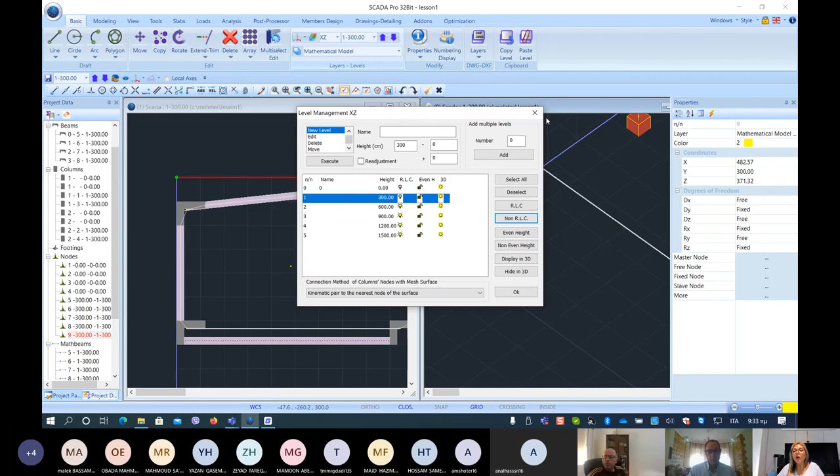So means that in the foundation floor, I don't have this, okay? But in all the other floors, I have this rigid link constraint because the program realized that in common structures you have slabs. If you don't want this, you can decide not to have the rigid link constraint, okay, or you can just delete the node. But before I do this, I want you to realize that this is node number 9.

So let me show you what it means to have this node.

This means that all the nodes around this floor plan will be slaved from this node in the dx and dz direction and in the rotations. So in this floor plan there is a condition, okay?

If I delete this, did it? I delete this, okay? And now I click on this node, I see that this is free, the degrees of freedom of this node is free.

For me, the most important thing for the first lesson is to understand what it means by structural elements. What a column is, a beam is, how they can be connected between them, how they can be slaved one from the other, okay? What the floor plans mean, what is the physical and the mathematical model, and why they are, okay?

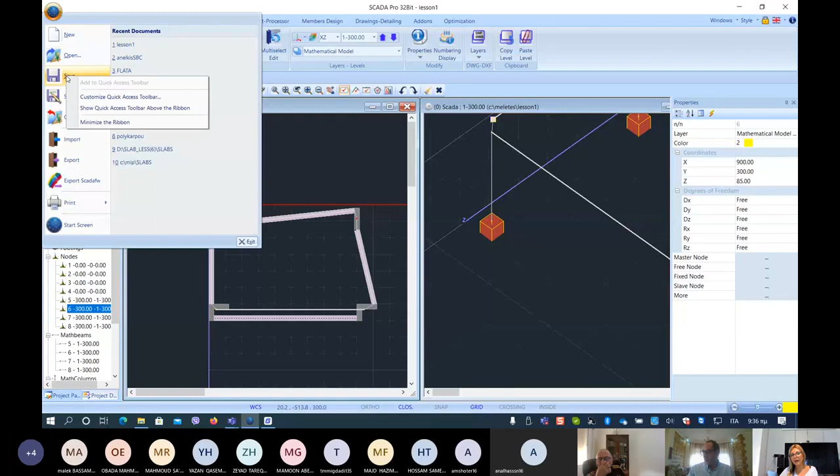Where I found this one, I found it here. So what I did, I click and add it to my toolbar. So I have it here. Very important, please do this, because it's very important to save.

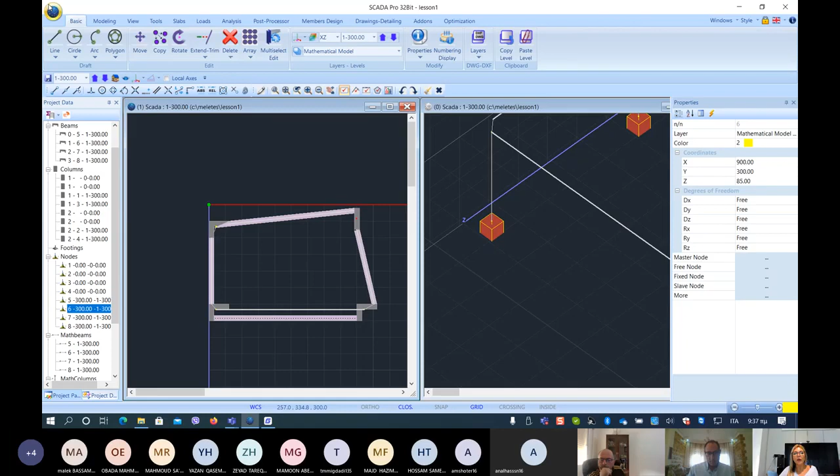Especially when you are new. So I save it, and now I can close the software, or I can just close the project. If I close the project, I see the environment without the project, but then if I want to take it again, I can just select it.

So here I am. I switch off my... okay, I will try to do this. It's okay. Now you don't see my screen anymore, is that right? Okay.